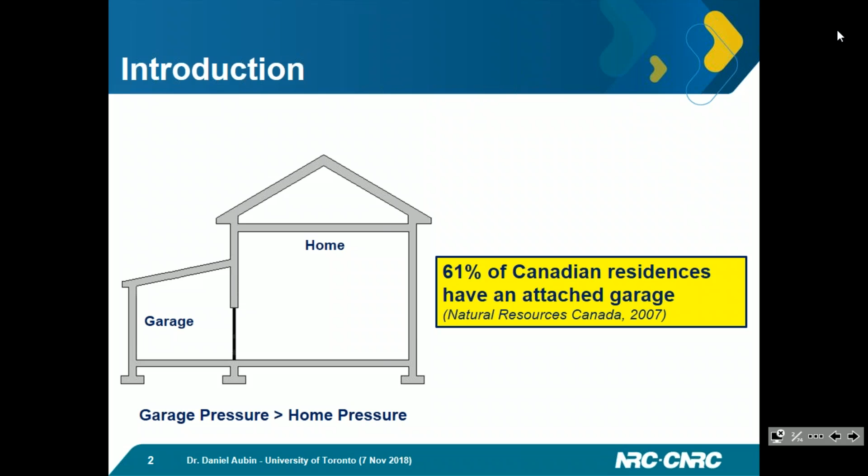The majority of Canadian homes have a garage, and these garages in winter tend to be at a higher pressure than the home. So what happens is that you essentially draw in polluted air from the garage into the home, along with anything else that's in there. That is an issue if you've got a garage and you've got a bunch of sources that are emitting potentially dangerous things like benzene, which is a carcinogen. You can and will end up drawing that into the home.

In some cases, in cold climate environments, they saw that you can get significant intrusions of carbon monoxide into the home, and that's just from starting the car, taking it out of the garage, or putting it back in. So it's not like somebody's in there running a vehicle for an extended period of time.

Some of the previous work from Don Fugler showed that a significant portion of the actual whole air volume in the home can originate from the garage, almost up to 50%. And along with that are these harmful pollutants. For example, indoor CO can be up to 16% coming from the garage. Again, that's another Canadian study.

An important one too is benzene, particularly VOCs. Benzene's a known carcinogen, and the guidelines are to reduce your exposures to as little as possible. So it gives you an idea of the extent to which you want to reduce benzene. Up to 50% of the total benzene in the home can come from the garage, and that's irrespective of how you're using the garage.

So if you're not using it to park your vehicle, but you're storing things like lawnmowers, snowblowers, small combustion engines, or storing paints or other items in your home, that will affect your indoor air quality.

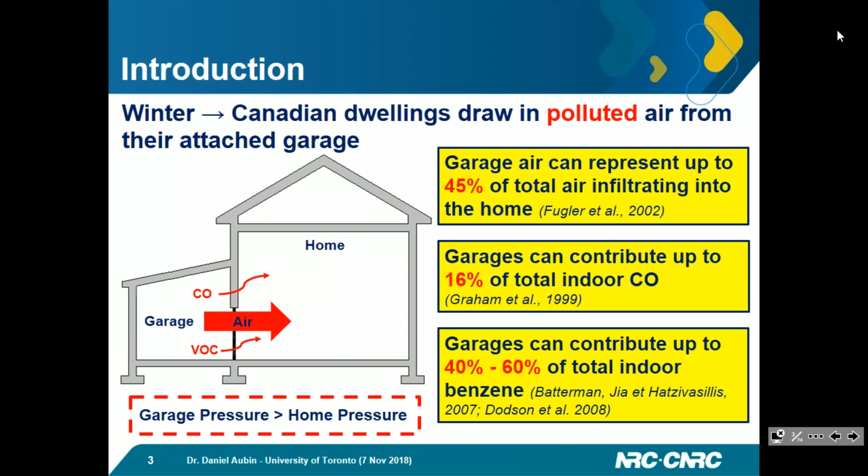So what drives that? There are a number of different mechanisms, but basically the home is depressurized relative to the garage. So if there's a poor air barrier between the home and the garage, or you're going in and out of the garage from the home, you are going to be essentially drawing in air from the garage into the home. There are a few mechanisms that contribute to that.

One of them is just wind-induced airflow, so on a windy day you will draw in air into the home. Also, if you're using mechanical ventilation systems and they're not balanced - for example, if some homes only have an exhaust ventilation system, like a range hood or bathroom fan, that's the only mechanical ventilation in the home - if you're running that continuously, you're essentially depressurizing the home. So that's another contributing factor.

But the most important one is in winter, and that's what's called a stack effect. Essentially, it's like a chimney effect.

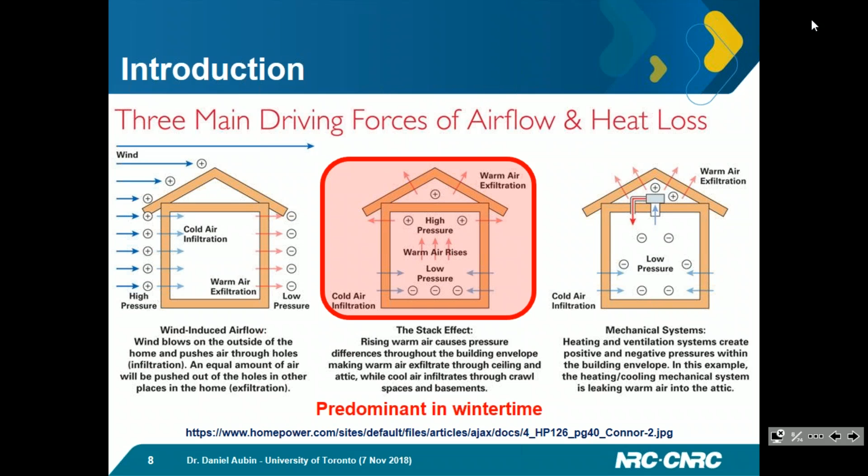You've got cold air infiltrating at the lower portion of the home, and then it's rising and exfiltrating out. So that drives most of the air exchange rate and airflow in winter. And that's the period that we were concerned about specifically, going back to some of the previous work done on this issue.

We were aware from other studies that this is common in Canada. This is for a study done by Health Canada in Windsor and Regina, showing benzene concentrations. You can see that if you have an attached garage, you have significantly higher concentrations of benzene in the home.

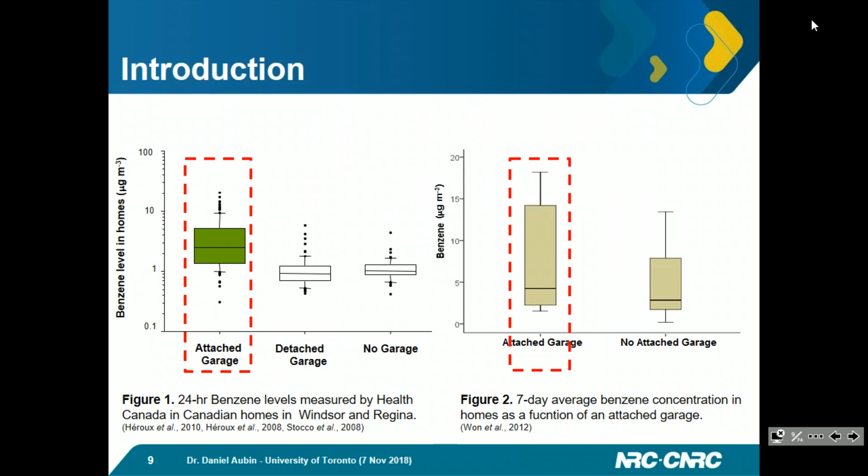This is a study I did in Quebec City, and again we see the same thing. This is regardless of what you're doing with your garage. Just having a garage attached to your home will lead to higher concentrations in the home.

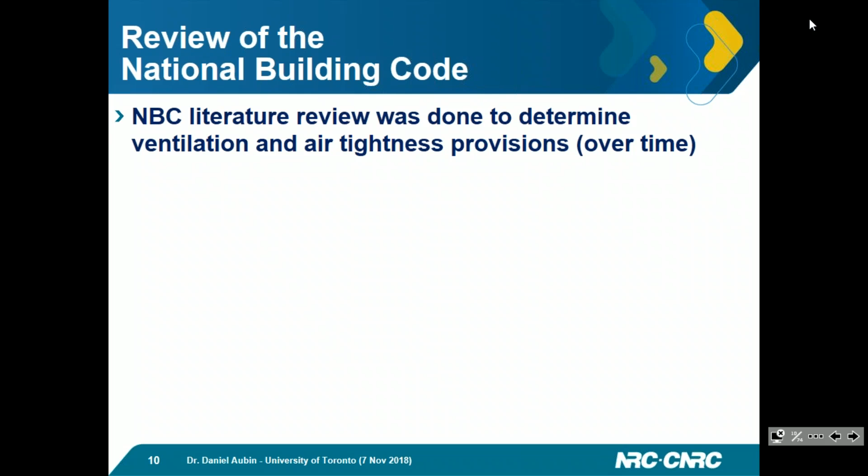Before we started this study, we wanted to get an idea of what historically were the prescriptions for how a garage is supposed to be built, how you ventilate it, and what the building code says. We went through all the different editions of the National Building Code, and what we see is that the definition of garage has changed over time, but essentially there are three common types of garages.

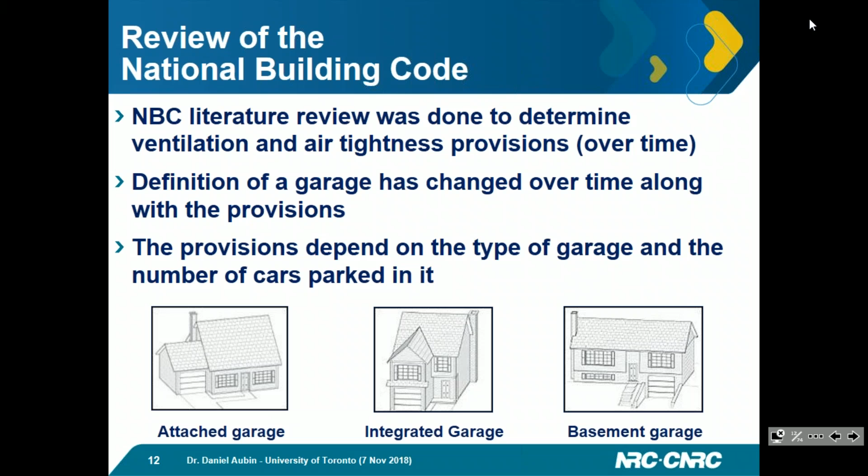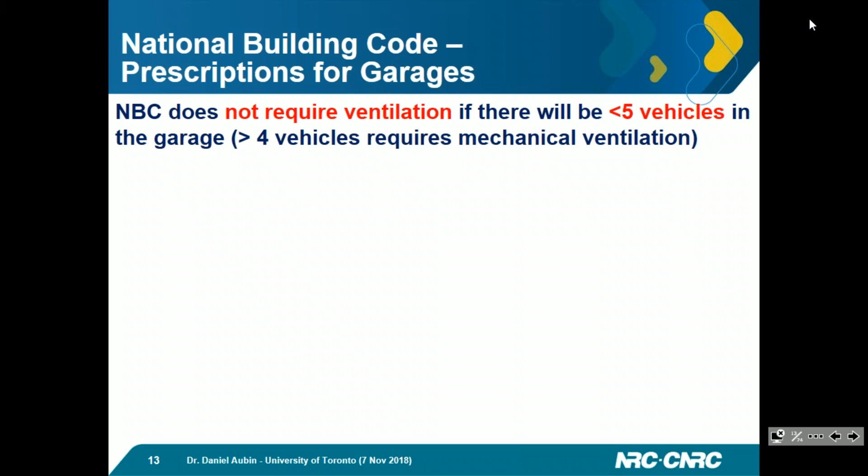You can have an attached garage in a detached bungalow, which is fairly common. An integrated garage, which is basically what you'd see in a townhouse, set into the home. Or in some cases you'll have a garage that leads into the basement. So this is what you could expect to see in the field. But the National Building Code doesn't say you need to ventilate your garage unless you have 5 or more vehicles in it. So there was really nothing specific about how to reduce pollutant concentrations, even though everybody would expect that parking a dirty vehicle means there's going to be stuff coming off of it.

Regardless of how many vehicles are parked, if you have a basement garage there needs to be a fairly good fire barrier, and that's obvious because a lot of these basement garages have living space above them, so if there's a bedroom there, that's the issue. For attached and integrated garages, you don't need a fire barrier, but you do need to make sure the garage is as airtight as possible. And that's about as specific as the code gets - maximize the airtightness, which really doesn't give you much to go on.

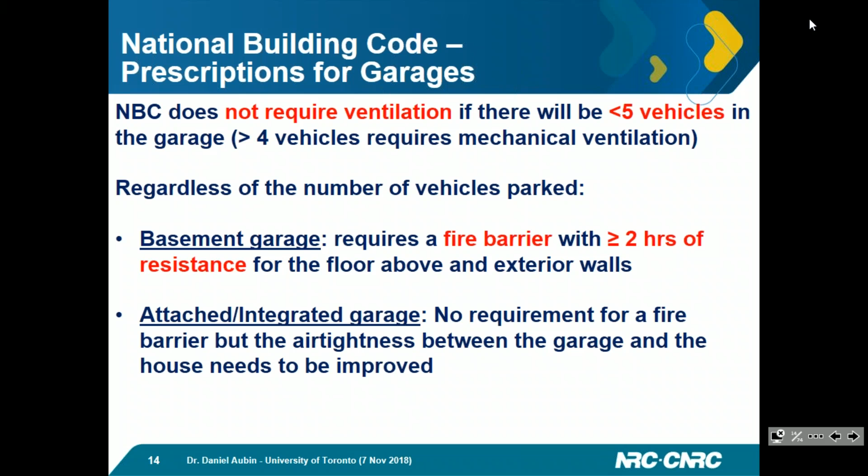Some specific prescriptions: if you have a garage, you want it to be airtight, so you have to put some sort of membrane between the garage and the home. That's like the Tyvek sheeting you see when building a new subdevelopment.

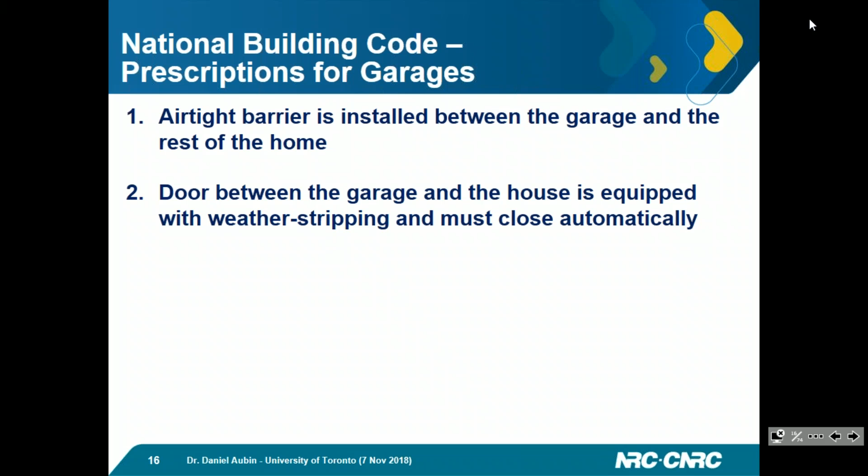Typically you'll have a door leading from the garage into the home - we didn't see a home that didn't have that, so that's basically all the cases. If you have that door, you want to make sure it's properly weather stripped, basically gasketed to make sure it's as airtight as possible. And you want to make sure the door closes automatically. Most people, if you've been in a home with a garage door leading into the home, you'll see it's usually a lot harder to open and close, and it closes automatically, to make sure the door doesn't stay open for an extended period of time. And obviously you don't want this leading into a bedroom, so we didn't see anything like that - typically the garage door leads into some sort of hallway or mudroom.

If you're going to use a membrane, you have to make sure it's properly sealed. So that's basically all the prescriptions, and we were looking at developing intervention techniques that could improve on this to reduce the air transfer.

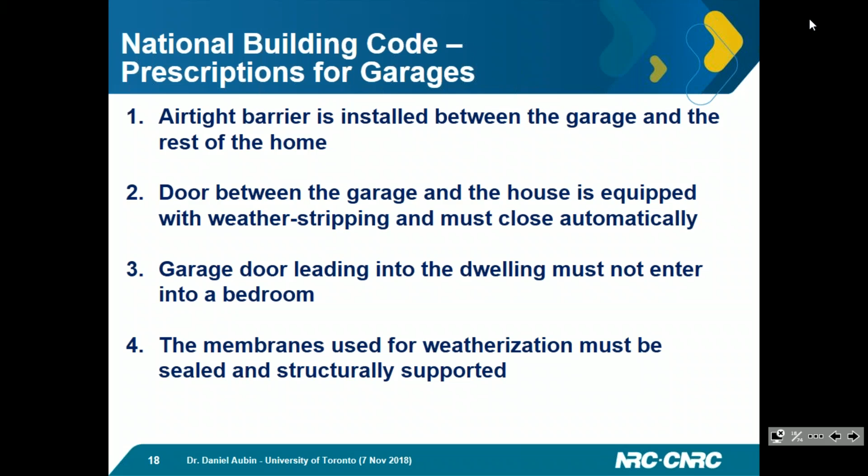We did a survey with the Canadian Home Builders Association about 4 years ago, and asked them what their construction designs were for detached homes with garages. They came back saying mostly integrated, mostly attached, and some integrated. And what we saw in our study in Ottawa, with 36 homes participating, was roughly the same proportions - most of the garages were attached, and the rest were kind of like townhouses.

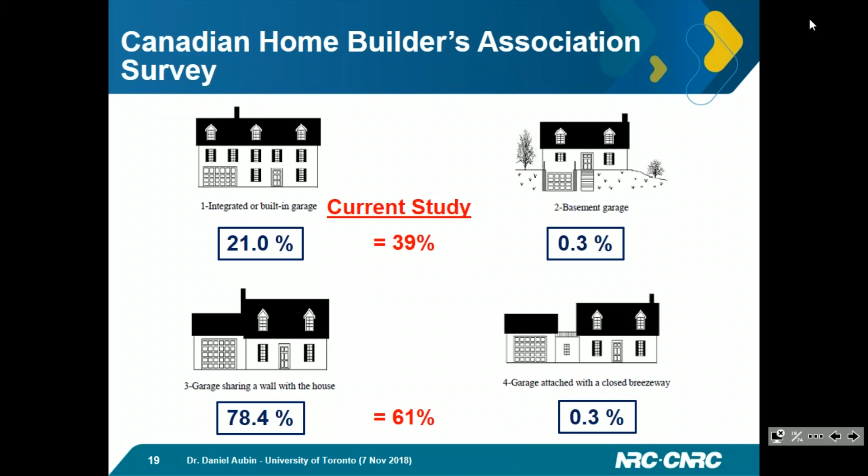So the experimental design was fairly straightforward. It was an intervention field study. What that means is you need to monitor the exposure to pollutants in the home both before and after your intervention. It's a combination of a regular exposure study with an intervention, and then you're testing the effectiveness of that intervention.

So the first intervention we looked at was fairly simple, and some of the literature suggested this: what if you added a continuously running exhaust fan in the garage? You're going to depressurize the garage and exhaust the polluted air, and you'd think that would reduce pollutant concentrations in the home.

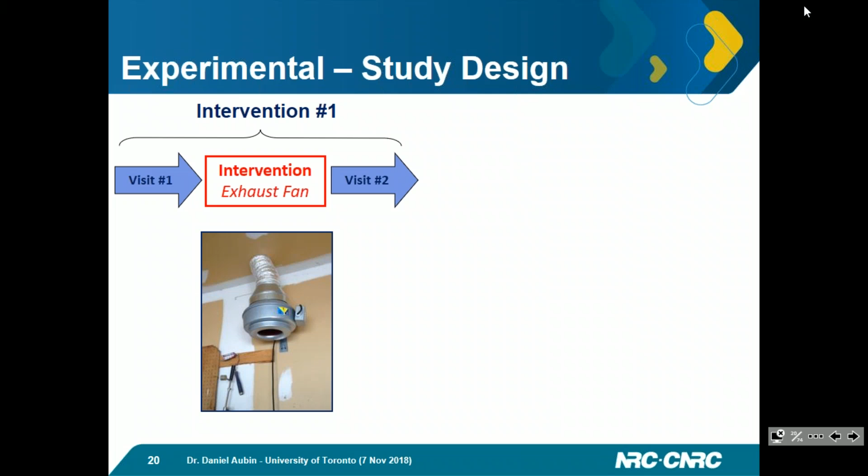And the second intervention we looked at was improved sealing of the common wall between the garage and the home—going in there, hiring weatherization contractors to improve that seal.

This was done over 2 years. The first year we did the exhaust fan intervention, and then we came back the second year, deactivated the garage exhaust fan, sealed it up, and then did the sealing intervention and carried on. So that's what I'll talk about today: the two aspects of this study, both the exhaust fan and the sealing.

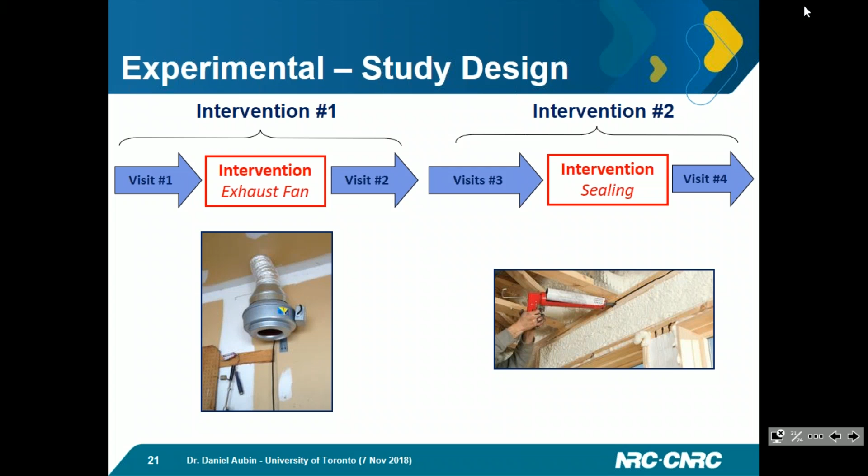So on the ground, this is what it looked like in the field. Because you're concerned about human exposures, you're looking at environmental pollutants, which is fairly straightforward. You're also dealing with the building science side of things, so you need to know things like ventilation rates in the home, interzonal flows between the garage and the home, the air tightness of the building envelope, and then we also did a number of questionnaires and time activity logs to get a better idea of how they're using their garage.

What are they storing in it—we did an inventory of the garage. And then we measured a number of compounds like volatile organic compounds, total volatile organic compounds, aldehydes, and then the rest of the usual things you see: CO, CO2, humidity, temperature, NO2.

In this case, for the exhaust fan intervention, we looked at the pressure differential between the house and the garage. How does that change when you start running the fan? Because that was the main crux of the exhaust fan intervention.

They looked at the literature dealing with asbestos, and they looked at asbestos clean rooms and what were the protocols for that. To safely work in that environment, you needed a delta P of 5 pascals between the lab itself and anything outside, to make sure there was no driving force for air contaminated with asbestos to leave the lab. So we thought, well, maybe you do the same thing with a garage and that'll be good enough.

So to do that, we wanted to measure the delta P between the house and the garage, and also between the garage and the exterior. We also added some sensors in the doors, the main garage door and the door leading into the garage, to see how it was being used. Then we measured all these parameters in the home and the garage, and on the outside in the backyard we measured VOCs and NO2 just to be able to correct the background concentrations.

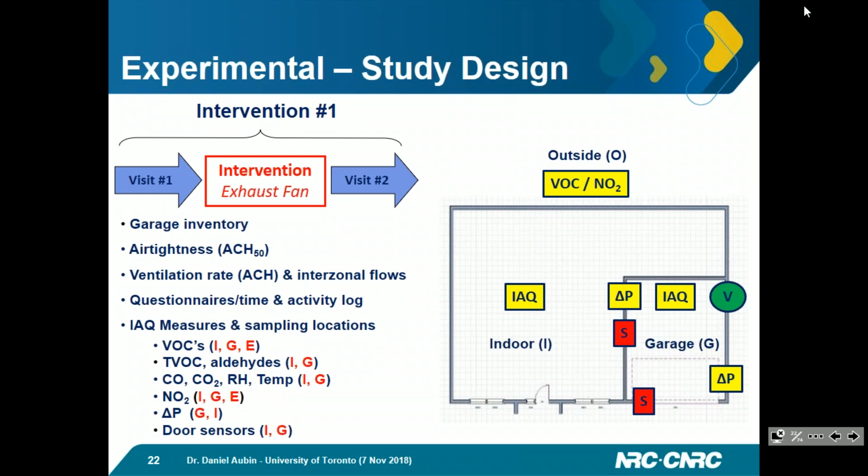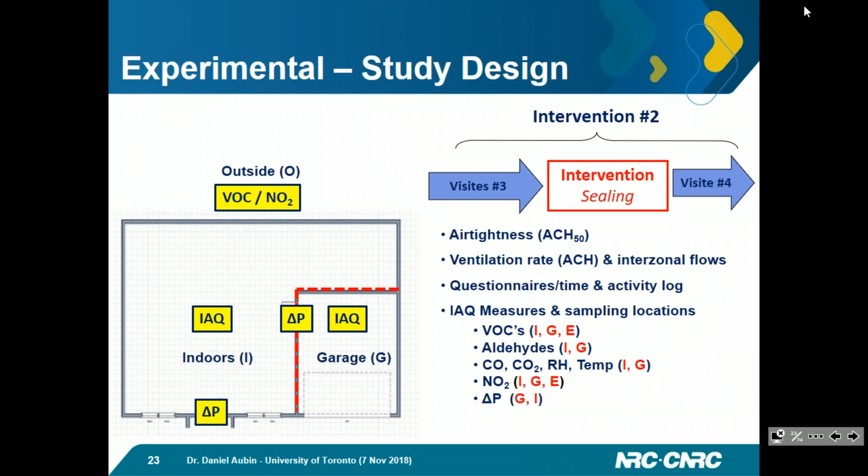Likewise, for the second intervention, the sealing, we did reduce the number of parameters we looked at. We figured out that those door sensors weren't really working properly, so we stopped using them in this phase of the study. Again, we looked at all these measures, and it was really important to look at the building science side of things in the sealing intervention, because we wanted to characterize how effective the weatherization was at improving the tightness of that wall, and how the interzonal flows between the house and the garage were impacted.

So just to get into analytical methods fairly quickly here: for the VOCs, we looked at both active and passive sampling. What I have here are these SUMMA canisters. Those were deployed in all 3 locations, and we had those analyzed by Environment Canada.

We also did some passive sampling with these passive sampling thermal desorption tubes. If you're familiar with analytical chemistry, they're about this size—you basically take the caps off, leave them in the home for a prescribed period of time, then bring it back to the lab and analyze it by thermally desorbing whatever's on the tube and analyzing that with the GCMS.

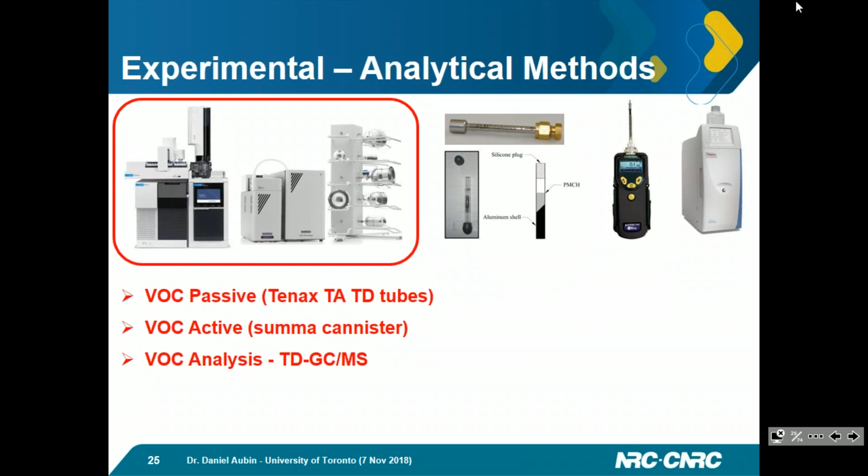And that's what that passive sampling tube looks like. We also wanted to characterize the ventilation rate in the home. And to do that, you need to use some sort of a tracer gas technique. So you know how much tracer gas you're emitting in the home, you measure concentration as a function of time, and then from that you can back out what the air changes per hour is.

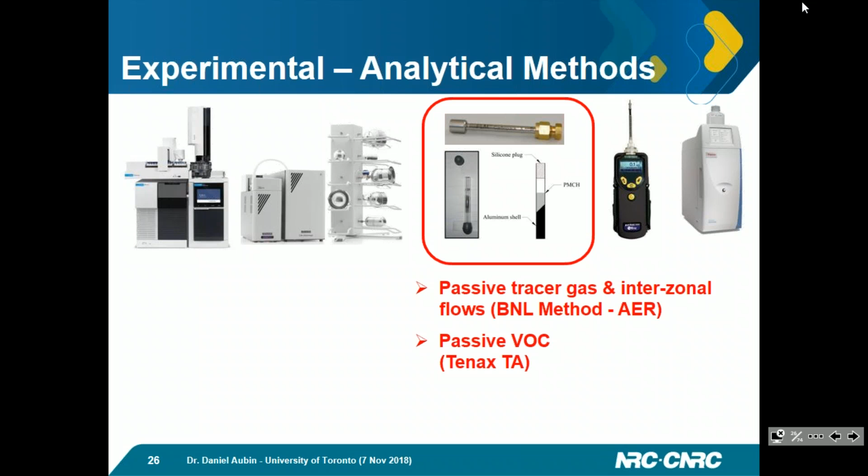And we used an existing method provided down in the States by Brookhaven National Laboratory. So basically you have a little aluminum shell full of a fluorinated tracer and a silicone plug, and it diffuses out of that cap, and then you just stick it onto the wall, and then take your corresponding passive sampler and stick it somewhere else, and then after 7 days, or in this case it was 4 days, we would have it analyzed.

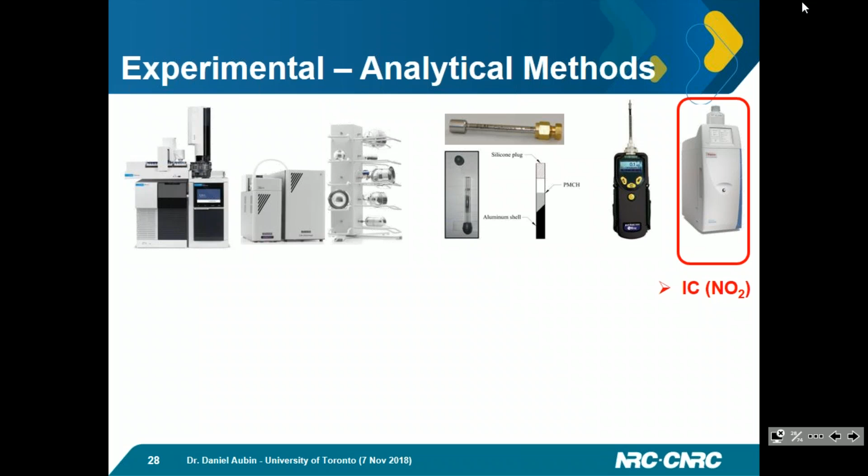Standard TVOC sensors. The NO2 is analyzed by using these impregnated Ogawa badges, and that was done at Dalhousie University. And the air tightness, or what's called the air change rate at 50 pascals, was done. It's a standard method, and most of you might have seen it if you have somebody that comes to your home to assess the energy efficiency of your home.

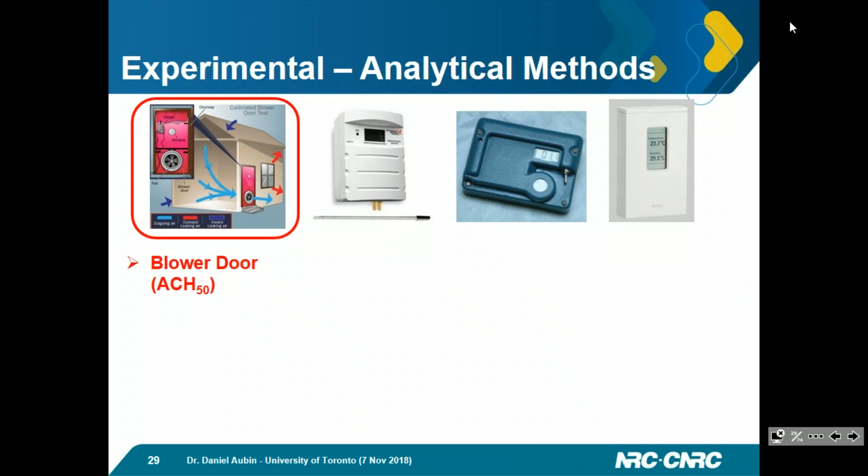They will do that. Basically, they install this door into your front door, and there's a large fan, and they run the fan at different flow rates and see what the pressure difference is outside and inside. And then from that, you can back out an air tightness. And the term for that is the air changes per hour at 50 pascals. And then all these other sensors that I had mentioned: the CO, temperature, RH sensors.

So I want to give a bit of background here. When we're talking about ventilation rates, I did mention the air changes per hour, but there's more than just that. So the air change rate is basically the amount of time it takes to completely exchange the volume of air in a space. And that's usually air changes per hour, given right here.

And that's a function of the volume of air that's infiltrating in the home. So if you've got a really leaky building envelope, you're going to get a lot of stuff coming in the home, both in and out. And that's driven principally by the temperature difference, as I mentioned before. And then you also have things like mechanical ventilation. You can be bringing outside air into the home. And then you also have something called natural ventilation, which is just basically opening and closing doors and windows.

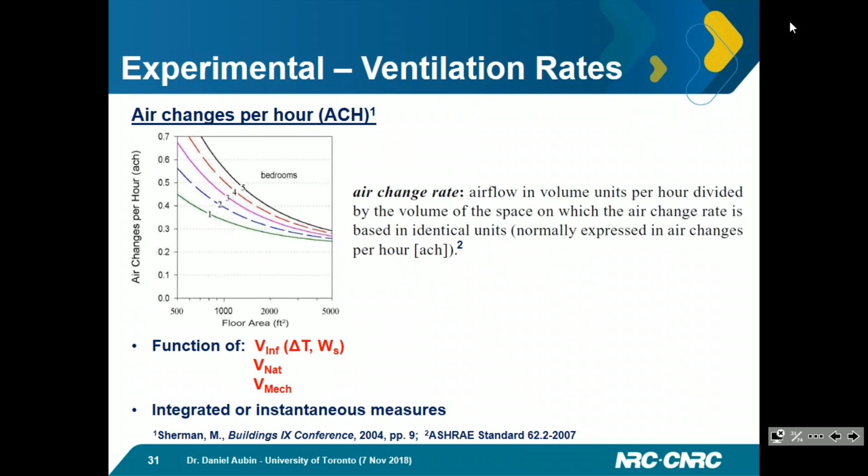So that will give you the overall air change rate. And then you could either do an integrated measure or an instantaneous measure. We integrated it over a 4-day period. And then along with that, we wanted to figure out what the flow of air between the different zones was, because you want to characterize how much air is coming from the garage into the home. And if you have multiple tracer gases, you can do that.

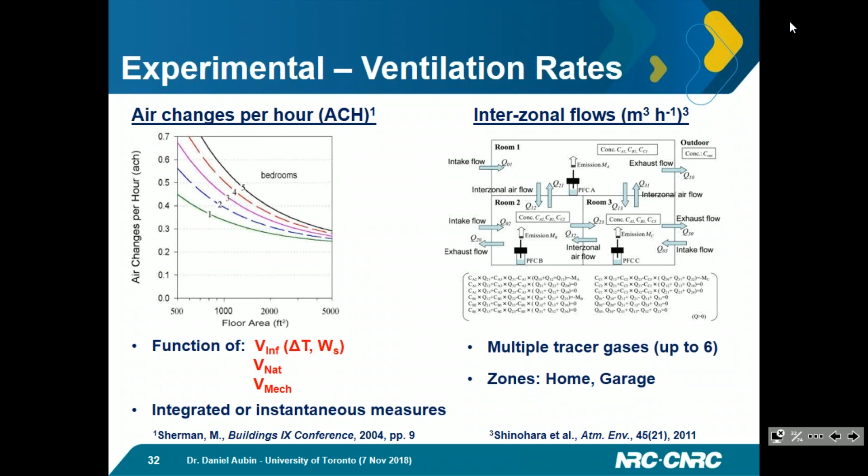You put one type of gas in the home, one type of gas in the garage, and a sampler in the garage, and a sampler in the home. By solving this rather trivial algebra, you can back out an interzone flow in cubic meters per hour, and that's what we did in this case. So the two zones that we looked at were obviously the home and the garage.

And coming back to the air tightness, or the air changes at 50 pascals, basically when you run the fan here at a bunch of different pressures or depressurizations, you get what's called a leakage curve. And then that gives you information about the air tightness of the home.

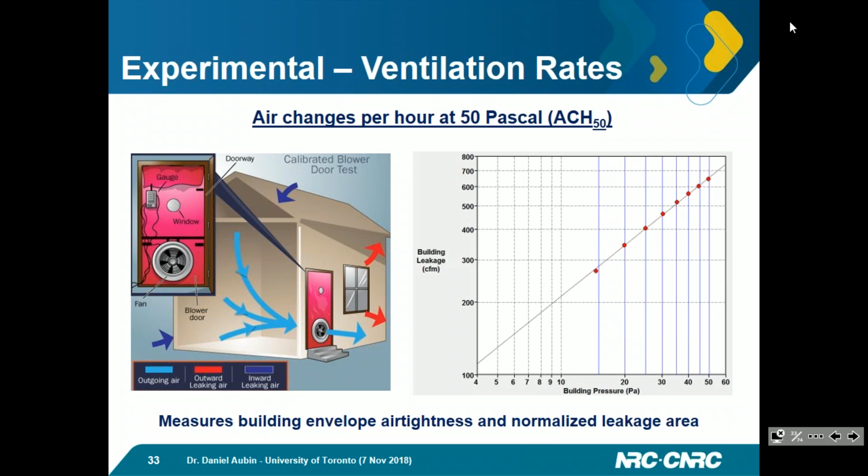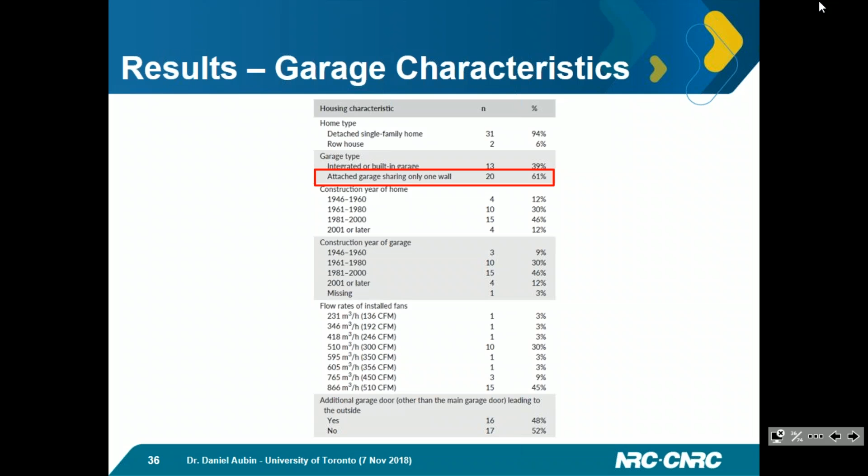So just some of the housing characteristics for the participating homes. So most of them were, as I mentioned, single-family homes, detached. And most of them only had one common wall, which made it pretty easy. If you go into a really high-end home, you might get a lot of complicated geometries with the garage. Sometimes it's really hard to tell if that section of the wall is outside, or if it's going into the attic, or into a living space. So they were fairly simple in that sense, fairly recent, again, 1960s onwards.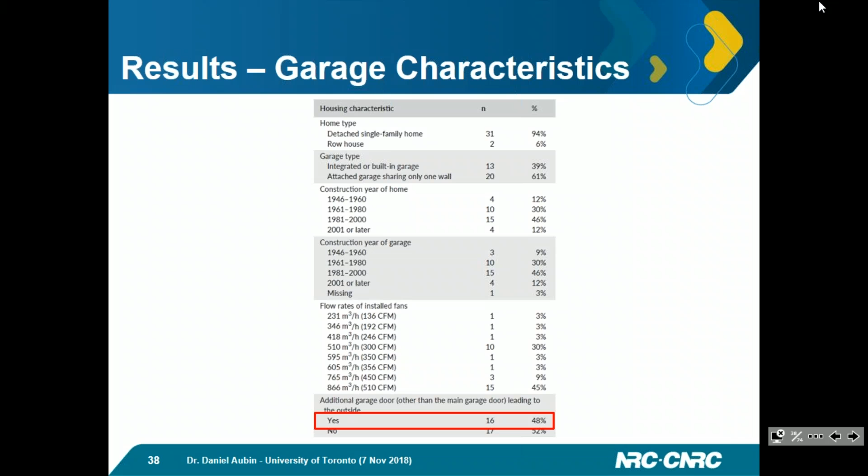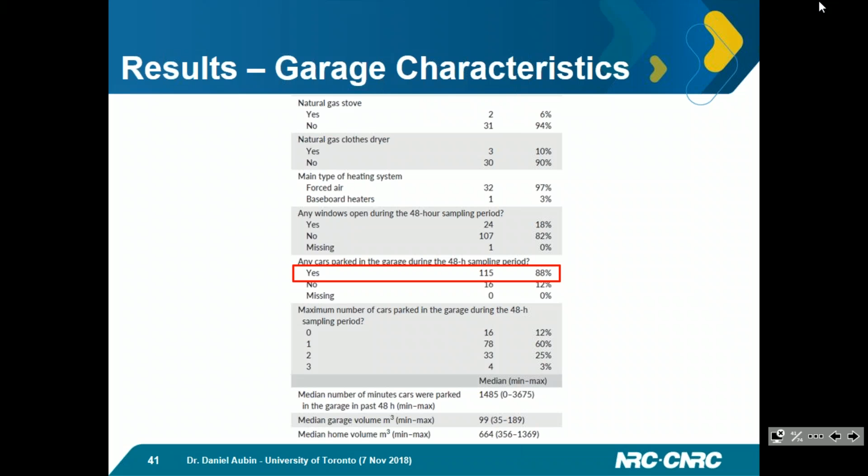And back to this question of a second door leading to the outside, because that's another leakage point. What it means here is that half the homes had a second door to exit the garage from the garage itself, besides having to go into the home and walk out. So most of the homes had some forced air mechanical ventilation system, which ensured reasonable ventilation in the home. Most of the participants actually used their garages for storing their vehicles. That's not always the case.

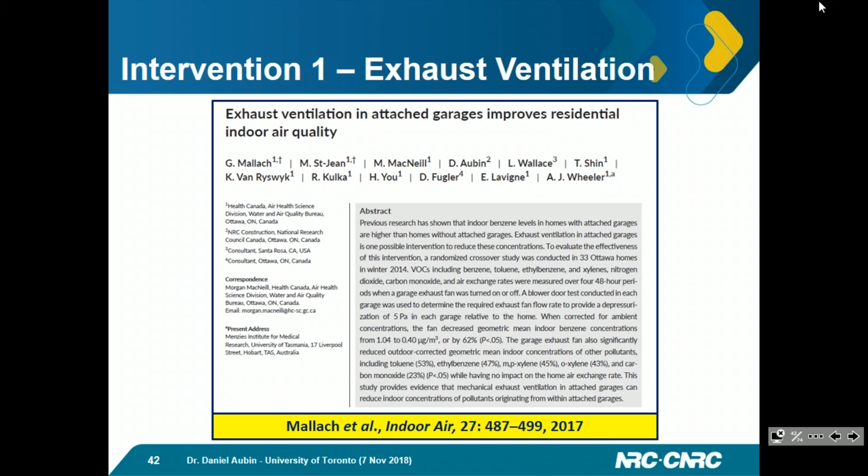So this is the paper that was published in 2017 on the first part of the intervention study, which was the exhaust fan intervention. So that's already out in Indoor Air. So in that case, what we did is we said, well, how are we going to get a delta P of 5 pascals? Well, you put in an appropriately sized fan. From the air leakage curve, you can kind of figure out and say, well, for 5 pascals, I need a corresponding CFM of, let's say, 150. So that's how you adjust the fan flow rate of the exhaust fan so that you try to target your 5 pascals. And that's a fairly straightforward way of doing it.

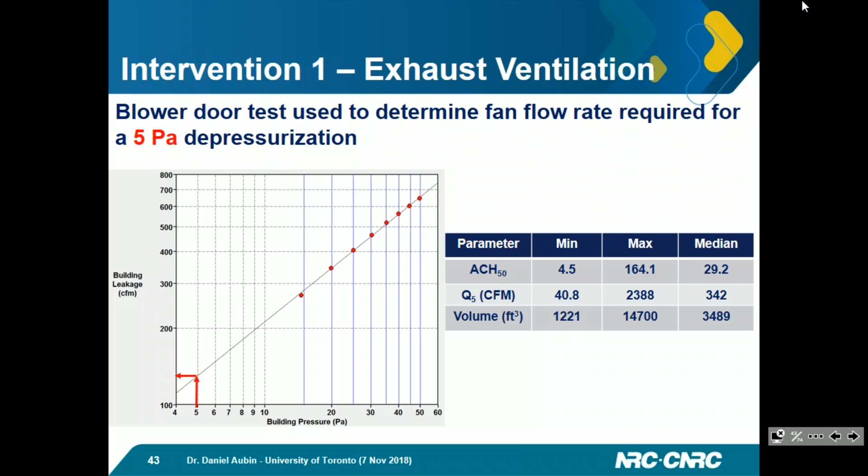So if you're not familiar with residential ventilation equipment, you know, 2, 4, 600 CFM fans are extremely large, and that's not something you can typically put in even in a range hood. So in that sense, it's a bit of an artificial factor, but we limited ourselves to 600 CFM. So we didn't add a fan bigger than 600 CFM, and if that's what was needed from the air leakage curve, then we just left it at that because that's unreasonable. It's like putting a jet engine into this garage and then having it run continuously while we're there.

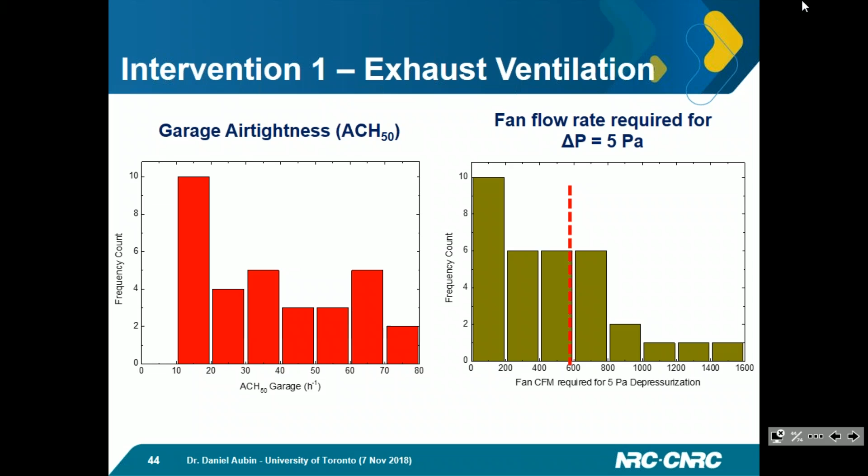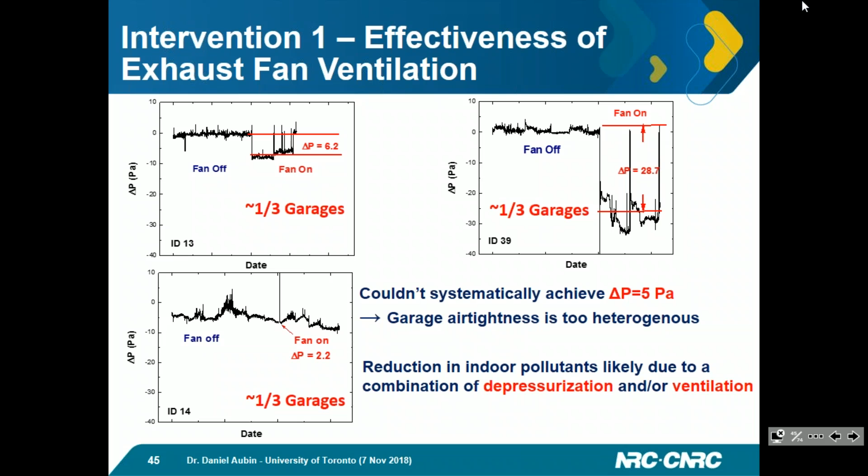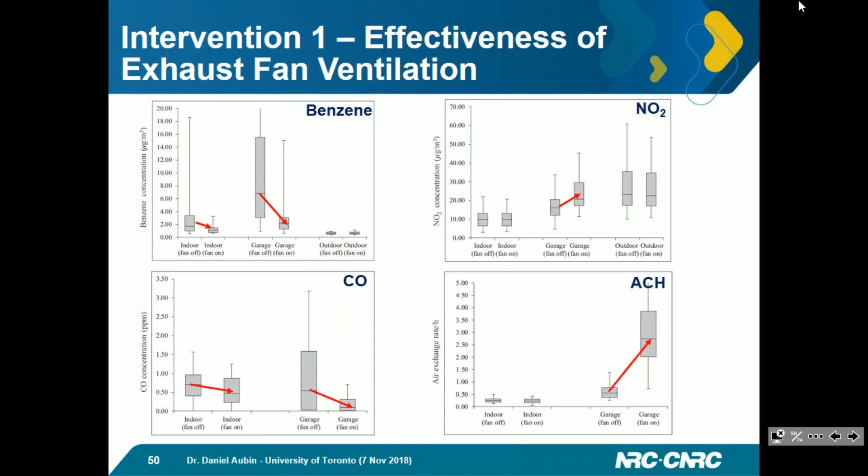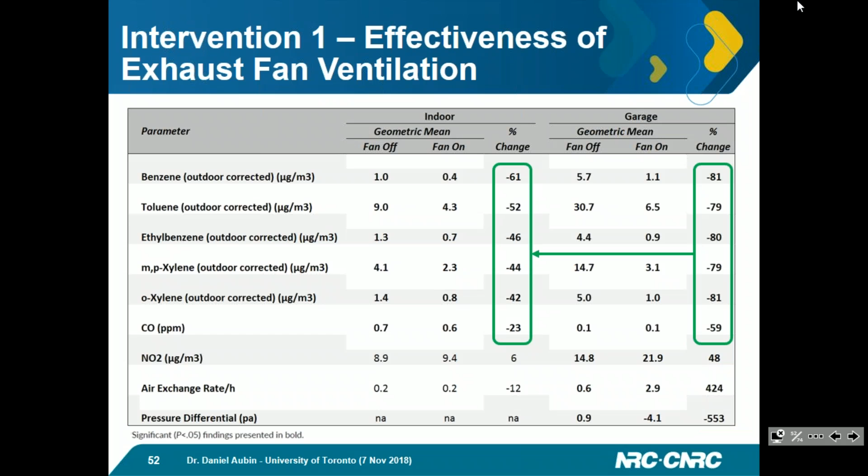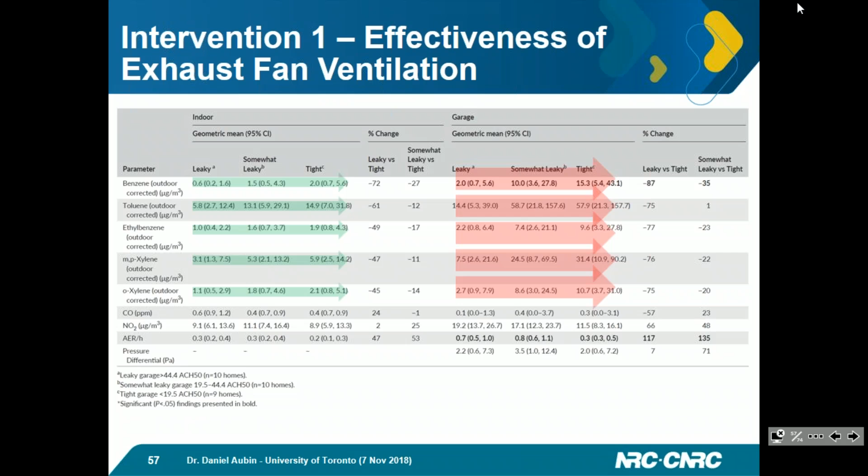And as you'd expect, again, for a given reduction in the garage, you'll see a smaller reduction. And then again, the exhaust fan is most effective in an airtight garage. So that might give you an idea: for somebody who's already got a new home, somebody tests the airtightness and says, well, it's super leaky, then maybe you don't need to worry about this issue.

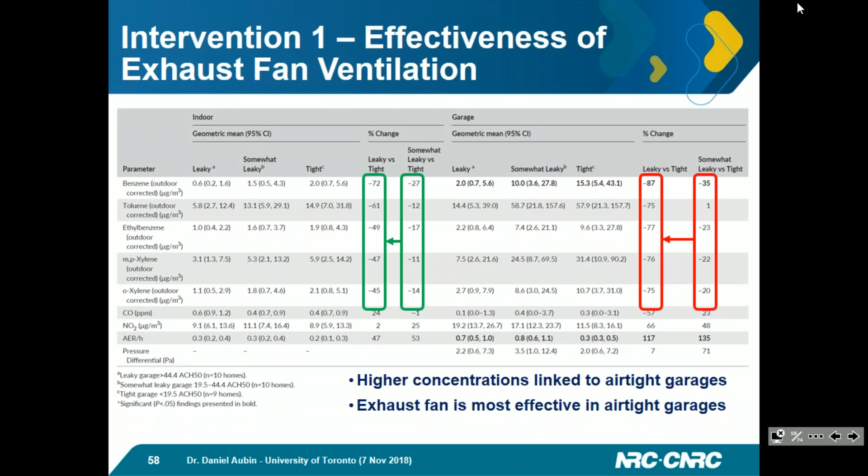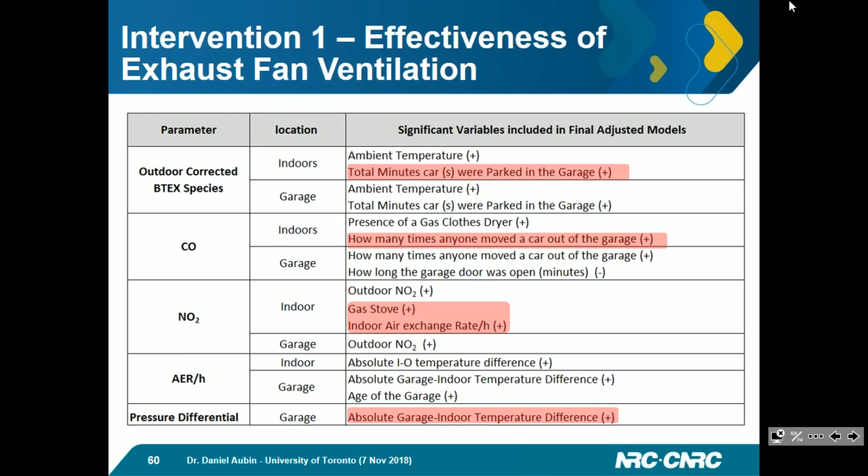But for NO2, if you have a gas stove, you have higher concentrations indoors, that's not surprising. And another thing that drives the delta P between the garage and the home is the absolute difference in garage and indoor temperature. So the colder it is in winter, the more air you're drawing in from the garage into the home.

So now I'm going to go into the sealing intervention. This was presented at Indoor Air this summer in Philadelphia. This gives an overview of the results we had from the sealing intervention. The way that was conducted is we hired 2 weatherization contractors in Ottawa. We said, this is what we want you to do: go into the home, identify the leakage points, and seal up that garage.

Again, we measured the airtightness, the flows, and the sealing. It was pretty easy to identify the leaks in winter with an IR camera. You're depressurizing the garage, you bring in cold air. So with your IR camera, you can quickly go around and find your leakage points.

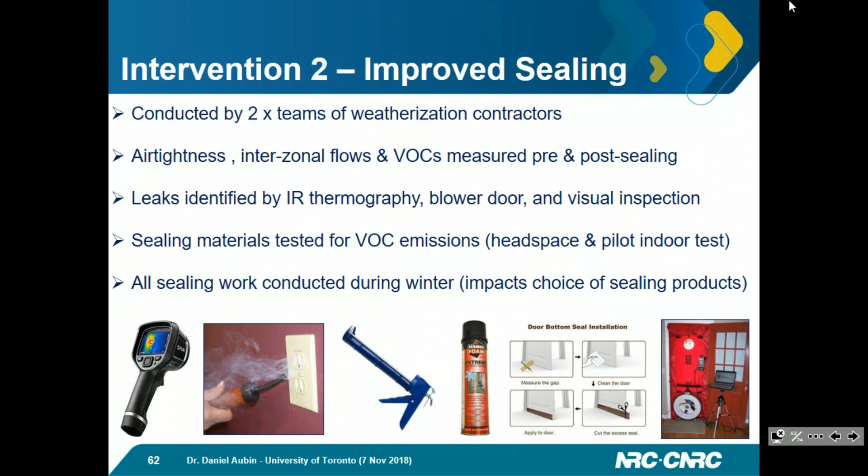And for the sealing materials, because we were worried about VOCs, we did some headspace analysis and a pilot test to see if, using these products, we were going to contaminate the garage with VOCs and then have that coming into the home. That wasn't the case. And all the work was done in the dead of winter, so it was about -30 in Ottawa when we were doing this. That impacts the type of product you can use. Some of the products don't cure at those low temperatures.

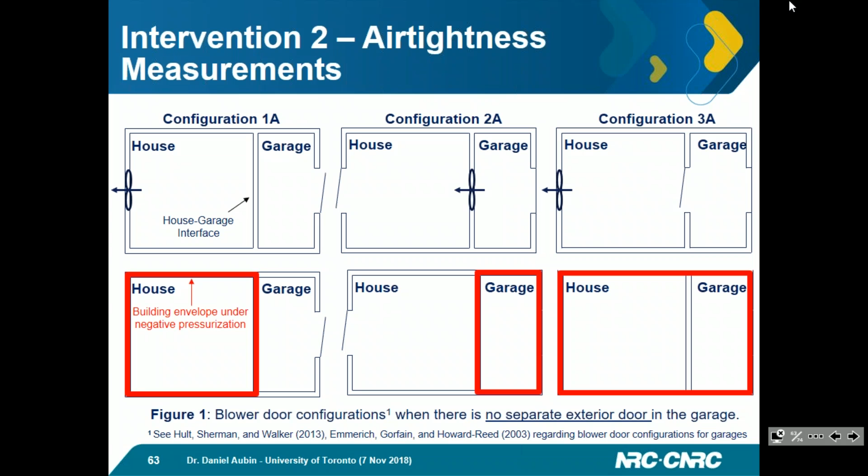So what we found was that you didn't need a whole lot of material to seal up a garage, basically less than a tube of caulking, half a can of expansion foam, and in all the homes we changed the weather stripping, just because some of them were fairly old.

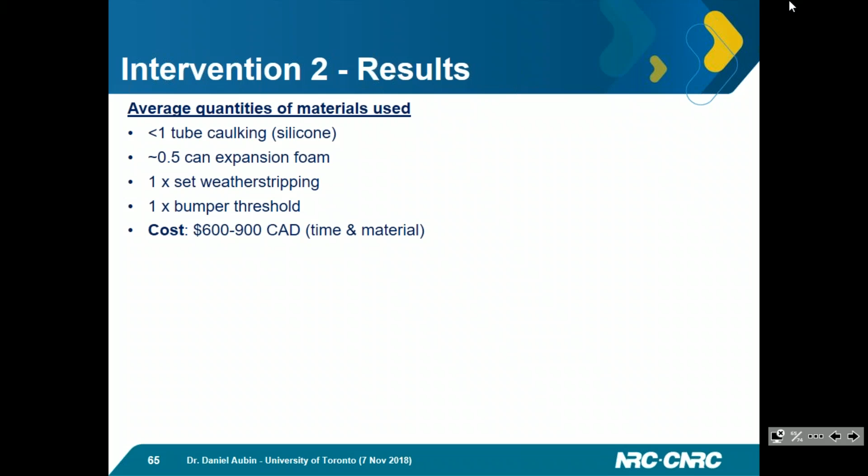Moderate cost and time. If you hired a contractor at home, a $600 to $900 job for two individuals in one day is fairly inexpensive. What took the most amount of time was just moving the stuff along that wall so the contractors can get to it. That took a lot of time. And doing the pre and post sealing blower door test took a lot of time.

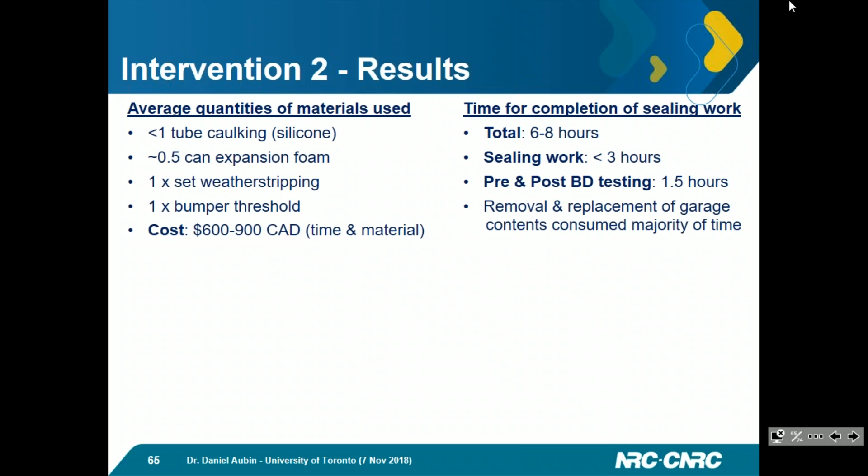But it is a completely feasible intervention that any trained contractor can do. The common leakage points were, obviously, the weather stripping is old and torn and broken up, the garage door frame is not properly caulked. That happens. You get a gap between the drywall and the foundation of the home, and the electrical outlets and things like that.

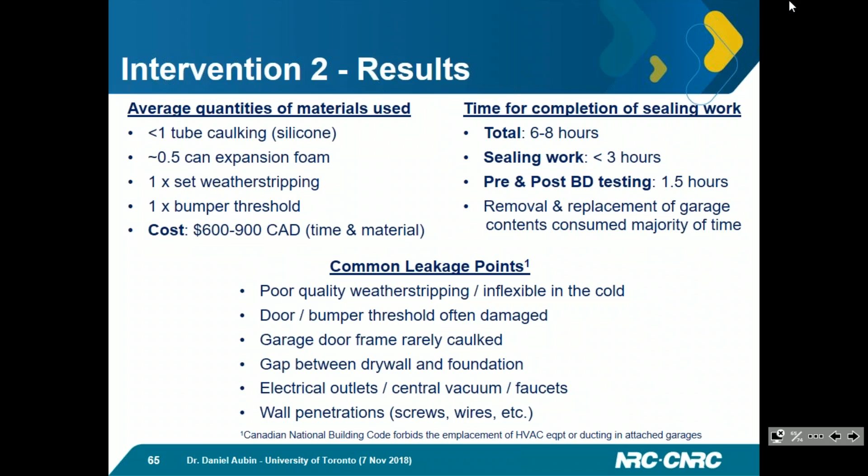So this is the impact of the sealing intervention on the air exchange rate at 50 pascals. That's determined with the blower door, for the home, garage, and home and garage, pre and post. These are the values here in the table. What's really important here is just to look at the median. And if it's bold, it means there's a statistically significant difference.

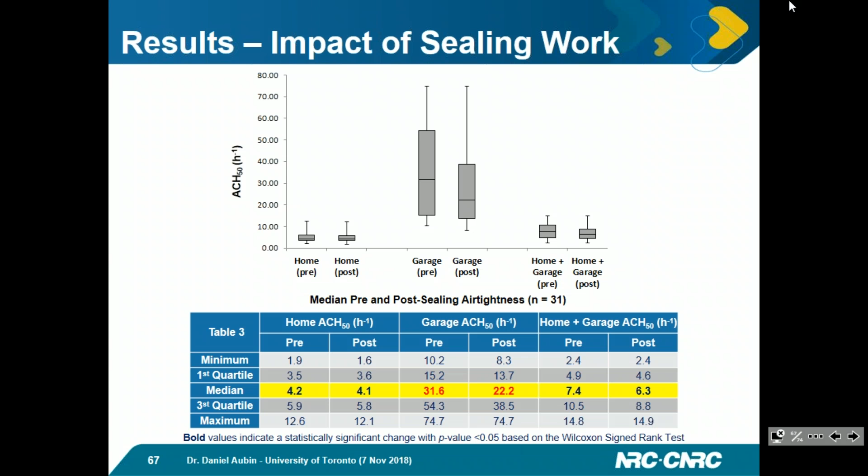So across the board, it was very successful at improving the air tightness of the garage, and a bit with the home, which was good to see.

And this is probably the most important slide for this part of the intervention. This is the interzonal flows that we measured with those two different tracer gases. So this is the amount of volume flow per hour from the garage into the home. That really gives you an idea of how much air is moving into the home. And again, we see a very large, almost 50% reduction in the amount of air going from the garage into the home. So this conclusively shows that this intervention is effective.

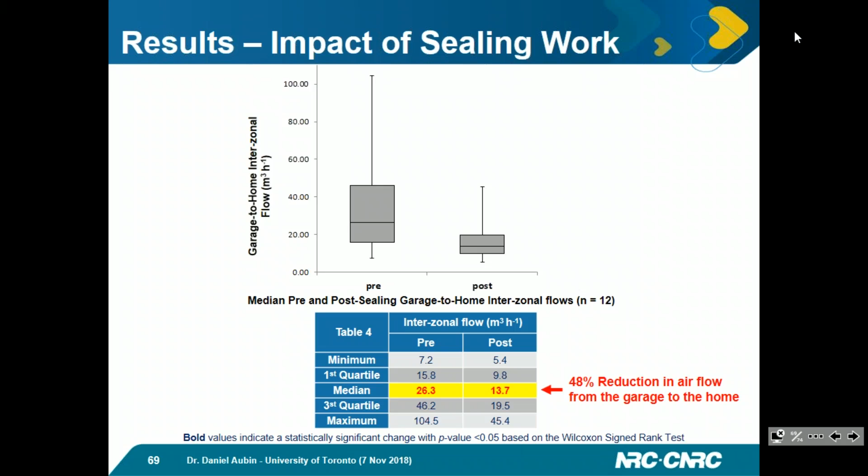And this is just another summary plot here. Some of the other factors: the interzonal flow is reduced by almost half, and the air tightness of the garage and homes all improved moderately.

However, the VOC analysis that we did was only done in a subset of 12 homes, just for scheduling issues. And with the 12 homes, we don't have the statistical sample size to show a statistically significant reduction. Although there were large reductions, it wasn't statistically significant.

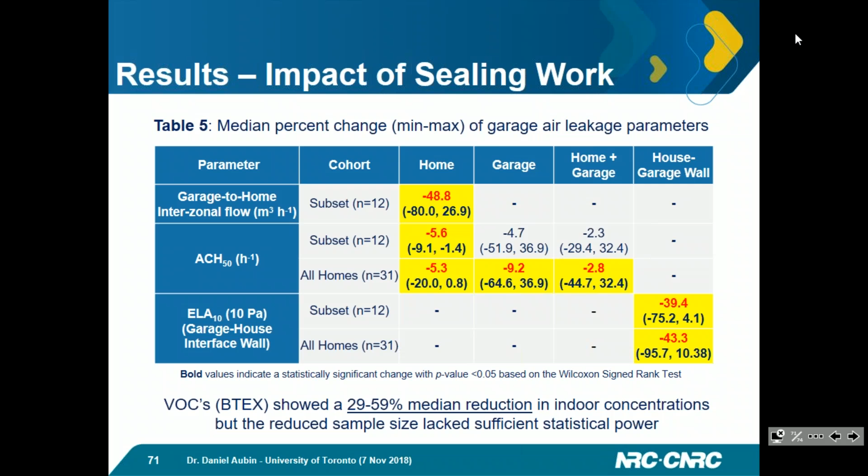So for conclusion, if you're going to look at these two approaches: the exhaust fan is very effective. You get large reductions in the garage and in the home, and it's practical—you can do it in one day. It's not that difficult, you're using commonly available construction practices and materials. It costs a little more, and the level of effort is a bit higher. It's useful for newer and older homes.

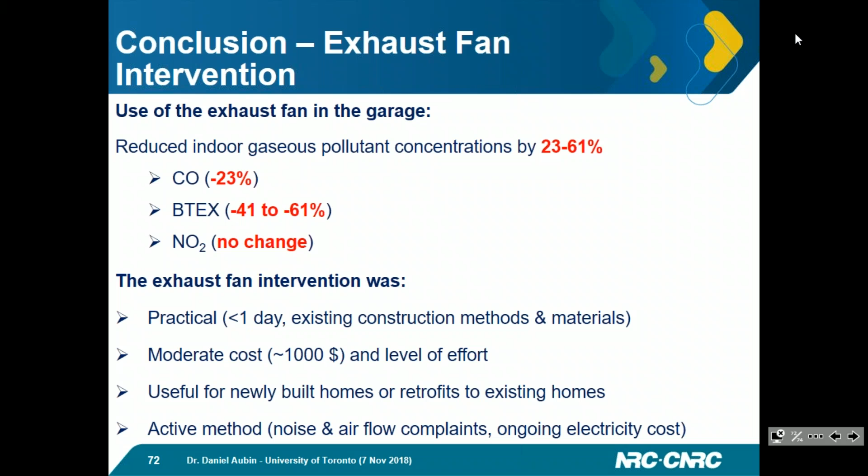However, it is an active method. You're running this exhaust fan, so there's concerns about electricity usage. And we had some anecdotal complaints about, oh, that common wall is colder in winter now that you're bringing in all this cold air into my garage, or I hear a whistling in my garage from the exhaust fan. So there were some complaints on that side.

For the sealing intervention, again, we had large reductions in the interzonal flows, and it's practical. It costs less than the exhaust fan, and the important thing is it's a passive technique, so you don't have to worry about all these issues of noise, electricity, and wear on the fan.

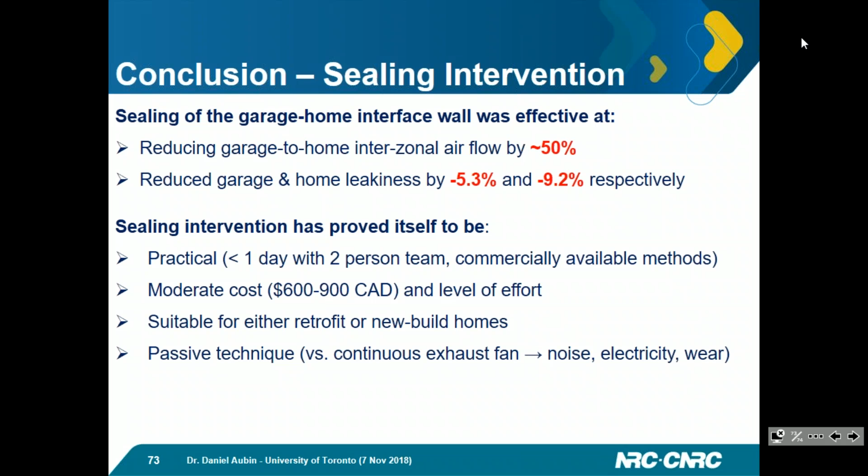So that's the end of the presentation here. Just some of the things that we might revisit in the future is looking at alternative ways of maybe modulating the exhaust fan use so you don't have to run it 24/7 for all of winter, which a lot of people might balk at.

We have all the field validated results, so we can easily do some modeling and see it. Maybe if you just run it 10 minutes an hour, or run it 5 minutes after you open and close the garage. So we're going to go back and look at things like that.

So that was basically an overview of what we did for 2 winters in Alberta, doing field work in the dead of winter. It was a very interesting intervention for existing homes. And with that, I'll take any questions.